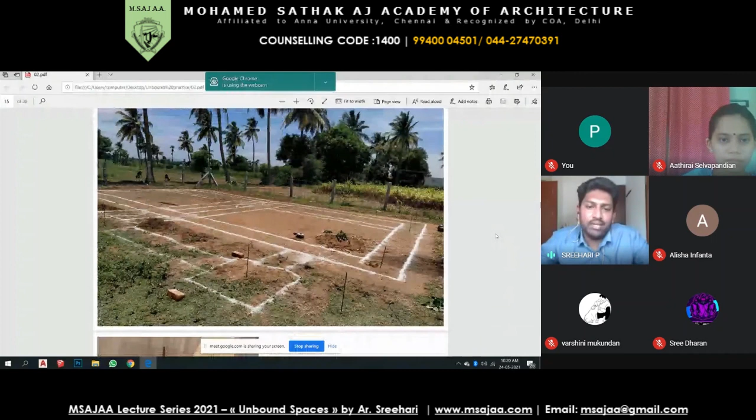My architectural drawings used to look like this. We used to draw at site. The canvas becomes large, it becomes 1:1. We probably design at sites at times.

You get to meet some people like this. He is one of the clients, his name is Carlo. He's from Switzerland. He has a firm called Fineram which practices with lime. He practices with lime, he is actually a painter- painter in terms like it is not like what we do here.

He experiments with lime. So we get to meet some people because we are in a field where people are very closely connected, it is a very close network. We get to meet people who share similar ideologies, or who are much more experienced and can share their knowledge with us.

Our lab looks something like this. This was a picture taken during one of our projects of his. We were experimenting with lime, and we were manufacturing some natural lime paints there. So the workshops or the site sometimes look like this.

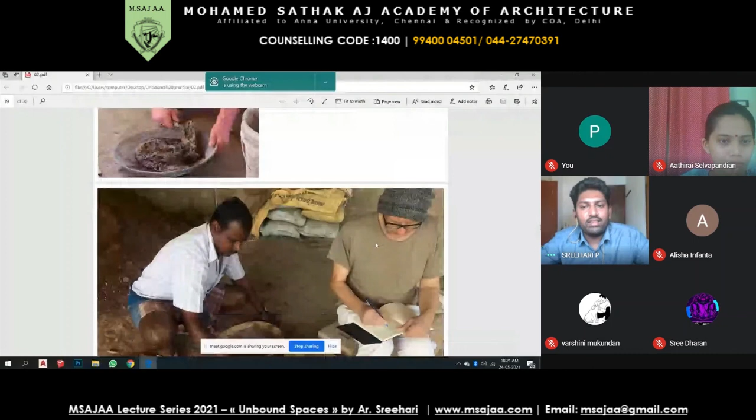Making some samples looks like this. You will be constantly noting all those things made. You'll be experimenting with samples. To make a wall like this, all this process has to be done, and the final product will be something like this.

So this is how a site work is entirely different from an office environment. I'm not telling that office environment is really bad, you get to learn a lot of things from there. You get to manage time, you get to learn organizing and meeting big clients, a lot of things like this.

But I always think that as a young practitioner or young architect, you definitely need to know all these little things inside the building, so that your design eventually evolves according to that.

So our discussions sometimes look like this. There'll be volunteers coming to our sites, and we'll be experimenting with a lot of things like that.

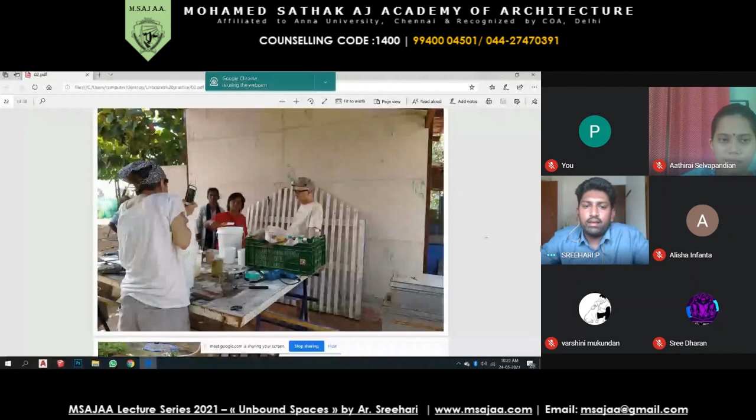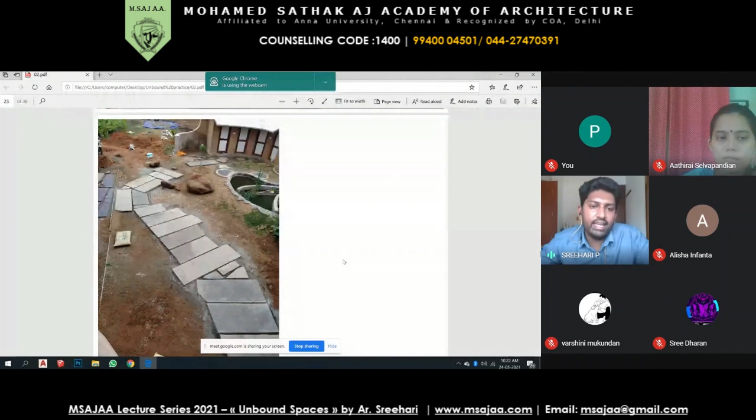This is just a small, silly example of a patterned floor. This is very easy for us to make in SketchUp or in CAD, but even for a smaller detail like this, you need to spend a lot of time behind it. This is what most people miss out on.

And this is what you get as an advantage of working at site- you get to know how it is being made. This will eventually reflect in your designs, and make your designs more practical.

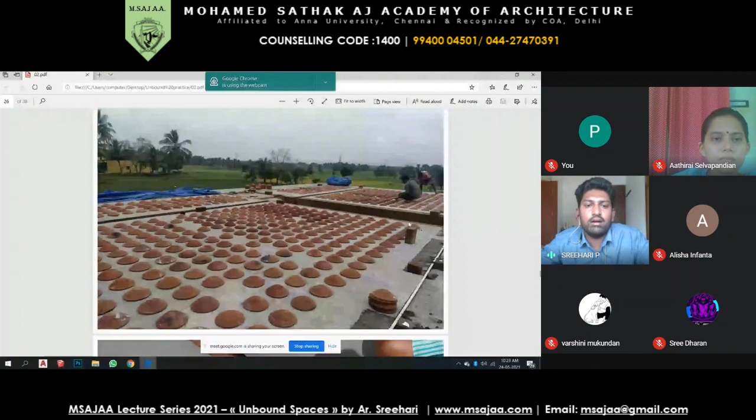Most people might know this is a filler slab. It looks very aesthetic in terms of the finished product, but what goes behind to make a similar product is an intensive labor process. Even marking the pots at site, or creating a niche there to hold these pots, is a very hectic process happening behind the scenes.

Next comes the foundation.

It is very easy for us to build raised walls and to design walls on paper, but what goes behind it, how it is structurally strong? The most eliminated or avoided topic during academics is probably structures, because it seems very rough and tough. But what actually helps you in real life construction is the same structures.

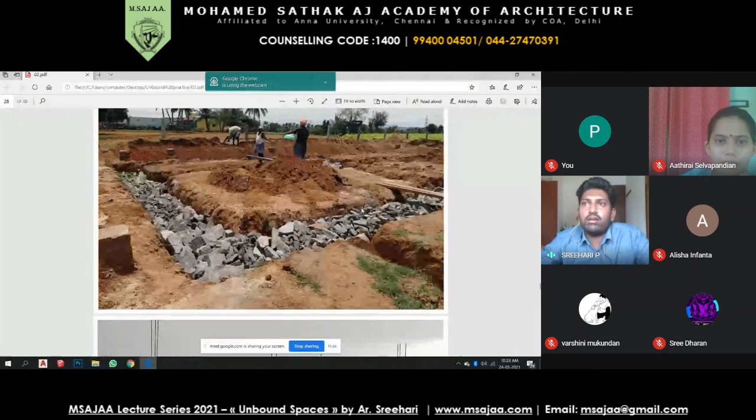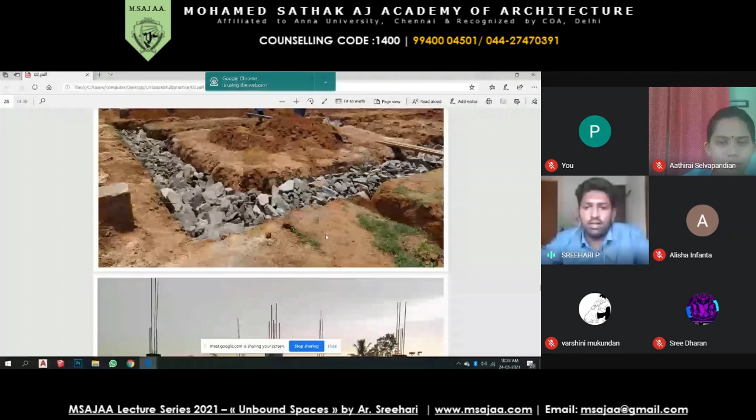You will experience a lot of things other than your general academics or just working on systems. You will experience how each structure is made, what is the process behind it. The previous slide you saw was a random rubble foundation, whereas this is a frame structure with columns standing. You will get to know what height the column should be, or how it should be placed.

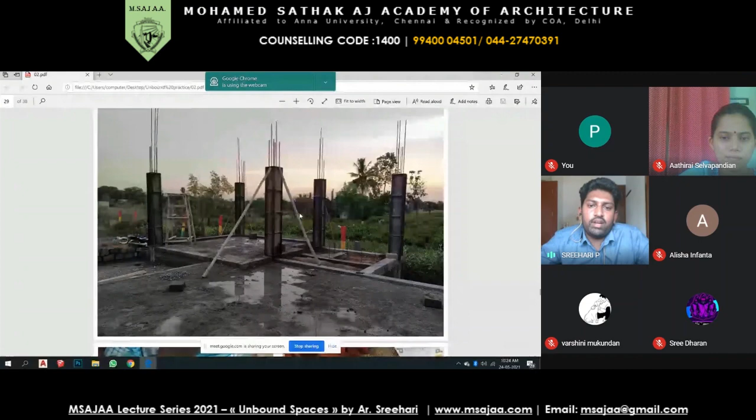All these props which are holding these columns in line, we will never experience those in our drawings. We can only experience the need of those when you actually visit your site. Just for example, like some brick masonry.

The most difficult part, or I would say the most interesting part of a building is the brick masonry, because that covers almost most of the space there, so it is most valuable. It is always important to know what goes inside, how to lay a brick, what the mortar is composed of, or how to do that. Brick masonry itself is a very technical thing, but we usually avoid that.

Being on site, you'll definitely need to experience all these things. If there's a joint, if there's an angle, or something like this on the left side, you can see a pattern we are making, like an inclined thing. It is very easy to do it in an elevation design, but it is definitely a harder part to do it on site. We will be exposed to all these things.

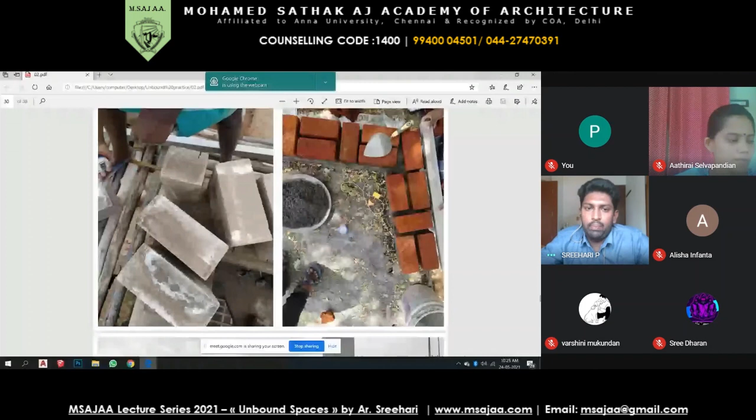If you are practicing in an office friendly way, you are supposed to experience all these things, which will eventually make you a person who designs very practically. That is what I have experienced through this. This picture you can see is basically in my design.

I had made cantilevered steps because aesthetically it looks very appealing than the normal stairs. It was very easy for me to make cantilever steps in drawing, but see what process goes behind to actually construct that at site. That is what you need to really experience, to give you an idea of what exactly goes behind at the site.

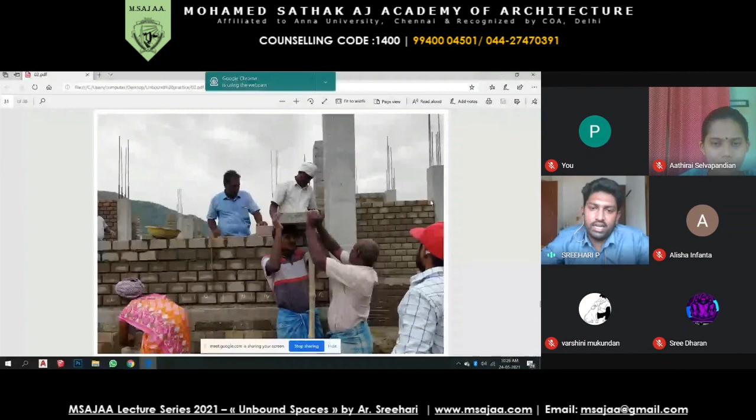This is another important part of being at site - you will learn how to deal with these people, because they are not people with an architectural degree, but with their experience of leading this field to a greater extent. So it is always important to convey your ideas to them. So how do you do that?

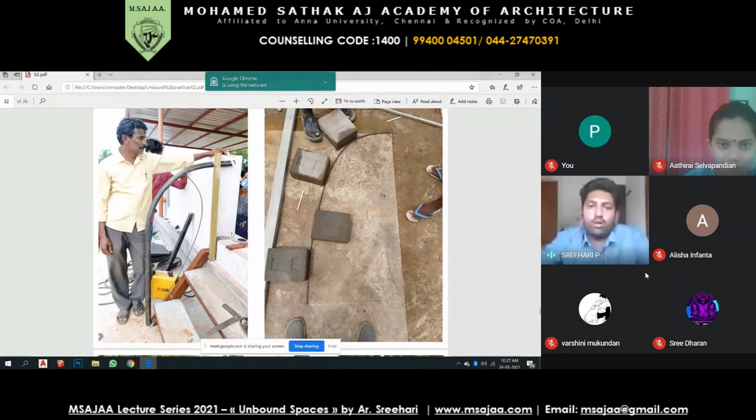If I need a curve like this, I can't randomly go and tell them, 'oh, just make a curve and it fits for me' - that is not the right way. On the right side, you can see I made a similar shape with a TMT steel rod. I drew it on the ground first, made it a curve with the help of our laborers, then gave that as a mold or template to the builder so he could manufacture this thing. The level of detail lies in all these things, which we usually miss out if we're not so attentive on site.

This thing is a rubble masonry, RR masonry. This looks okay, like some stones are laid or something like that, but to bring out this process, this is how the initial steps would be. You should be at site, you should tell them okay. This is entirely different from brick masonry, which is all crisscross, perfect stones. Since you need patterns like this, it is always important to be at site and talk with the labor and the mason who is doing the work.

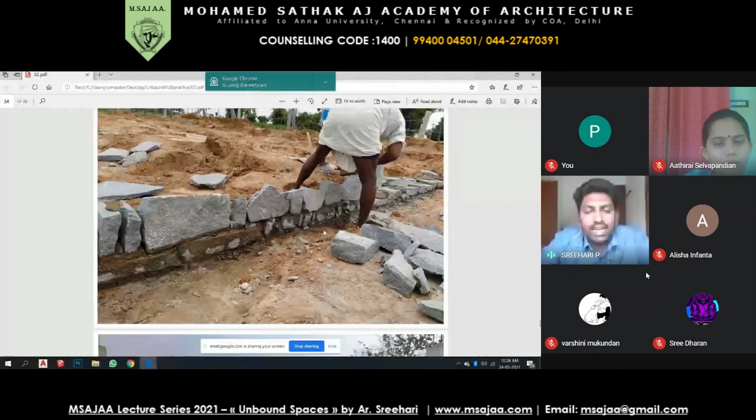Just tell them what your idea is, and they will give you inputs, and with that you develop a pattern, and with that you'll be constructing something at site. It is extremely labor intensive, these processes are, but it is always fun to do that, because you are in a free environment where you can experiment with whatever materials you have.

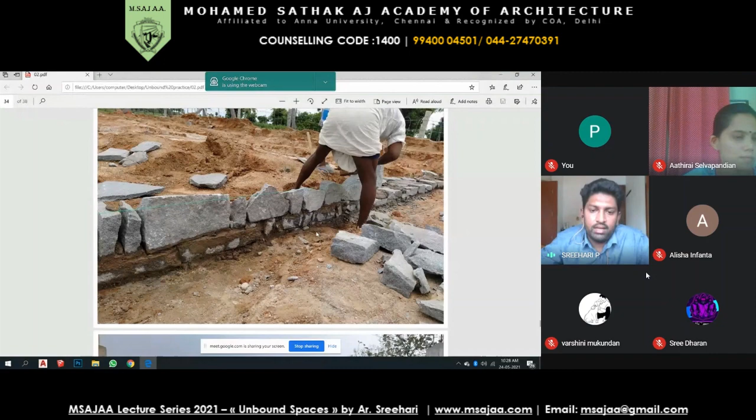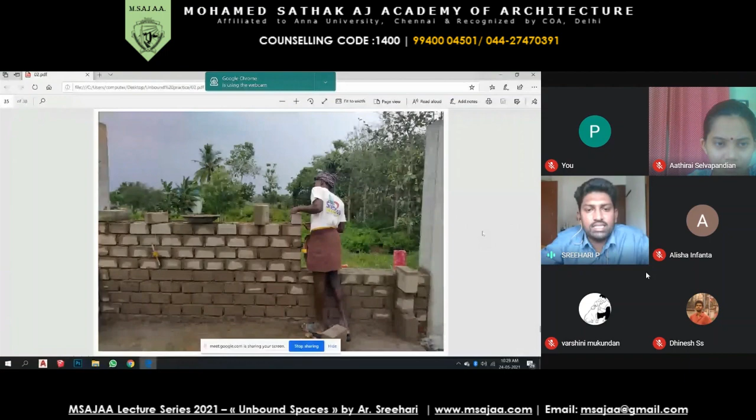As I said, it is masonry. So if you look at this picture, probably you will say okay, this is just a picture, there's just a mason laying those bricks, but it is much more than that. We have to see whether the patterns are in line, whether the lines are exactly in the center of the other bricks, the mortar thickness are the same, if the window measurements are the same, the gap given for the window is the same, or how much bricks has to be there to get to the required height. So a lot of things happen behind the scenes. You will be fortunate enough to experience these things if you are at site.

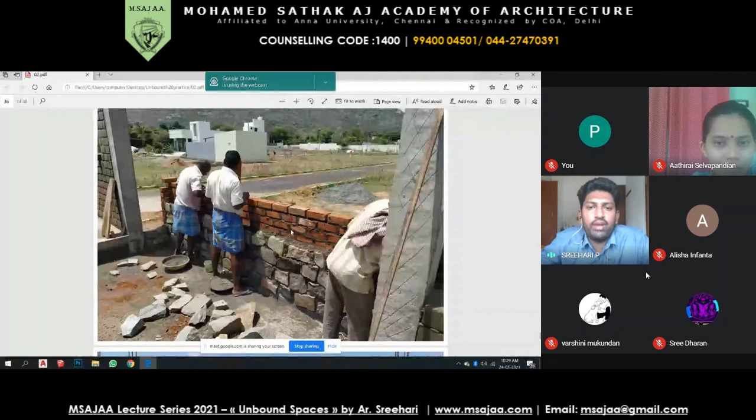See how a brick wall is done. Initially these masons will not have that vision of the final product, but through your communication and interaction with them, they'll get an idea of what they want, and it is your duty to bring that in. For that, it's not like you can send a drawing and wait for that thing to happen. You have to be at site to get something like this.

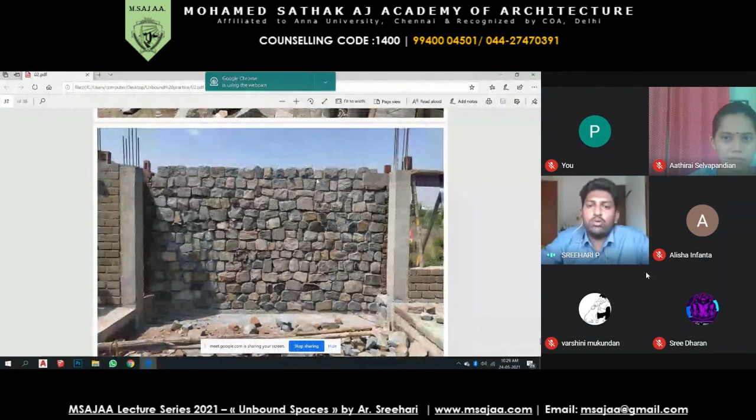So this was a pattern I had made for a residence. It looks very simple. Even if I see a photo of something like that, initially I used to think, oh it's just a stone wall, but it is not that. It is a very labor intensive process. You have to select each and every stone there, you have to fit it, keep it, and make sure that it fits there. If there is a color difference between them, you have to really check into it. So these are the things which you basically learn if you're at site.

And last but not the least, these are the team. These are literally like the gurus. The one thing you should always keep in mind is these people will not know what an architect is, or may not consider you as an architect. We should look into them as fellow workers or co-workers. You should exchange your ideas with them, even from a male labor to a mason to a carpenter. Everyone, you should talk to them, so that with all their experiences and trial and error sessions, they would have come up with a great solution, which only through your communication or interaction you will get to know.

So these are the foremost primary people of any construction, the laymen or the base workers. They teach you a lot. So unless and until you explore beyond the concept of being in an office environment, or explore being at a site and experiencing all these things, you will learn a lot. You will basically understand what the basics of construction is, or the basics of everything that is being built or done at site. With that you can probably develop your ideas, or design a better thing. The dimensions or everything, you will get to learn a lot from them.

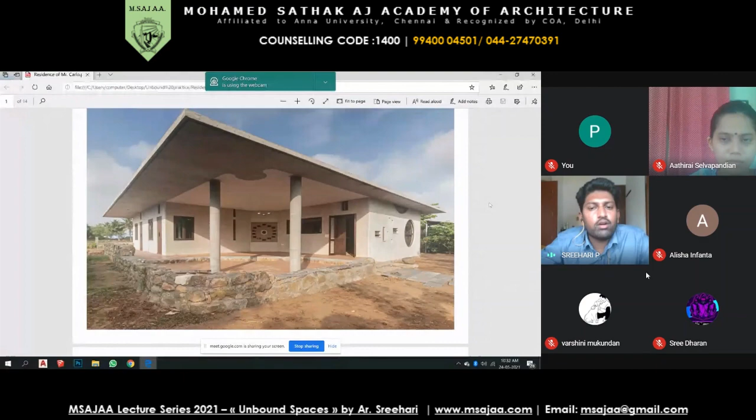So this is a front elevation of the facade of the building. You can see a very beautiful cantilevered slab extended almost 5 feet plus outside.

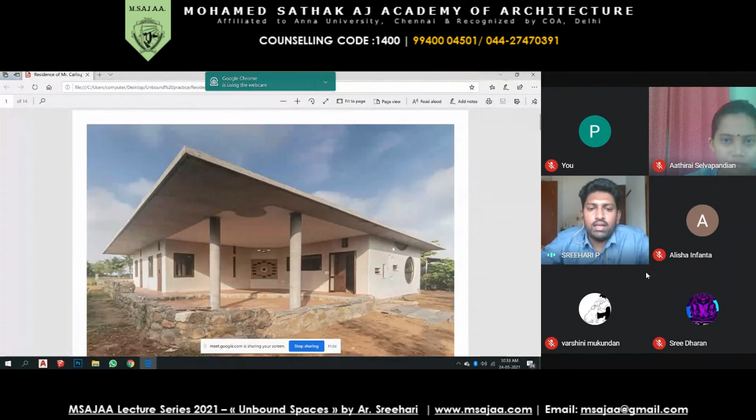You can see the front veranda, which has a Roman flooring, a lime flooring, which is not usually seen anywhere because these practices are very labor intensive and people are not so convenient doing this. The major difference between a conventional practice and a traditional practice is that these building materials or practices are not always convenient. It's not so convenient to just lay a brick or something like that. It requires a lot of labor, and it's a labor intensive process.

So this was a Roman flooring. The color was brought with natural color pigments. Again, working on site, you get to learn about materials a lot. So you know where the material comes from, how to procure a material, and what quality you get.

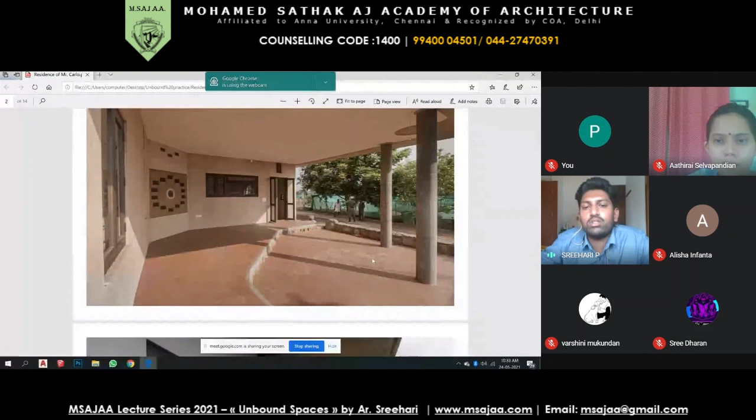These windows and doors are from old buildings. These doors are directly from old buildings. These windows are resized, or the wood is reused from old ones, which we usually procure from Pondicherry or somewhere like that, from old buildings. They demolish these buildings and these probably go to waste, so we used to get those beams or columns. We take them into consideration and reshape them into all the required necessary things.

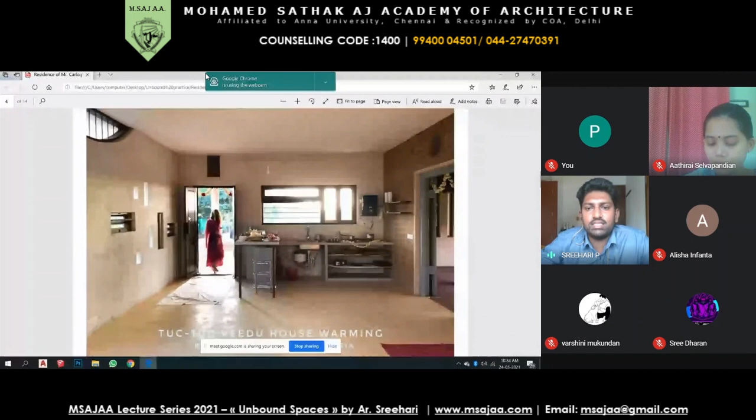So this is a very simple interior of the residence. You can see it's completely lime plaster and exposed work, lime flooring which is of a yellow color, and an open kitchen which is again an exposed concrete thing, and lots of ventilation, because light and ventilation are the basics of everything we design.

So this is how an exposed wall looks. This house has a courtyard as a major element. We have used terracotta flooring here, that too unshined, a very rough sort of terracotta, which the client preferred a lot. You can see a door towards the center of the room.

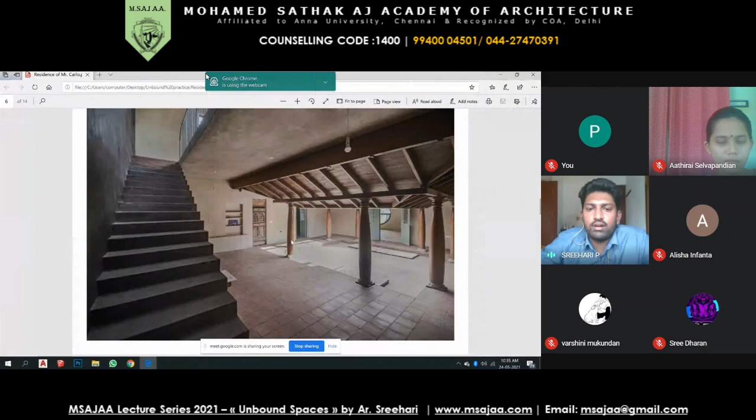That door was directly from an old house. It even had a house number and all, so we retained that. We carefully took those elements into consideration and kept them in the house, which sort of complements the design. The courtyard, you can see that house with the number there. So that is how rustic the practice was.

The flooring and these pillars are all from traditional houses, but you will not find all the bases of these pillars there—probably we get one or two. So we try to find laborers who have the ability to manufacture or replicate the same thing. We do all those things: research, draw these details, give them to some people, give them the sample, and get it done.

That's something like a courtyard with this clay tile, which is a traditional tile. Even laying this tile is an interesting process—it stays in some sort of friction or something like that. So everything is interesting if you visit the site.

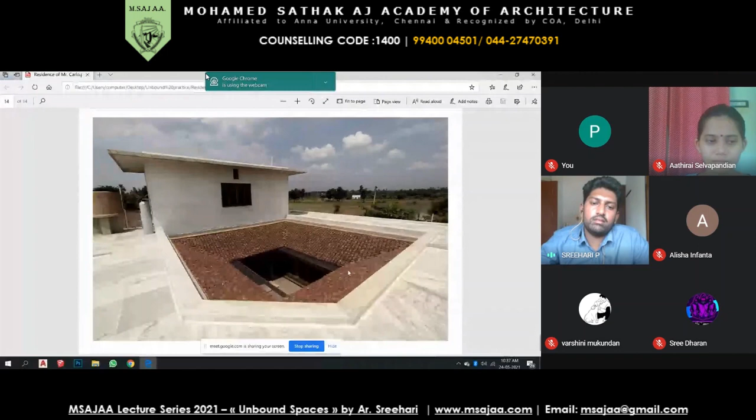So here you can see the exterior or top view of things. We have given white marble here. It is very strange that we have given a very low cost terracotta tile inside and a costly marble upstairs, because it was just to reflect the sunlight.

We needed some white sort of material, and the client was not so happy with using tile there because it was not nature friendly. So the alternative white was, even though we could have gone with lime plaster or something like that, the client chose to have marble. So yeah, this is how it evolves. It's not just one thing that you should always keep as a standard and work towards.

With that, I'm just winding up my presentation. I know it is a completely open sort of thing, because it was a very casual, broad brief which I was about to talk about, and I just had one hour of time.

So I was probably hurrying up to show exactly what goes behind practice on site, and not just stick to an office environment. I definitely encourage all those people - at least one or two years of your architectural career should be spent on site. You should be at site.